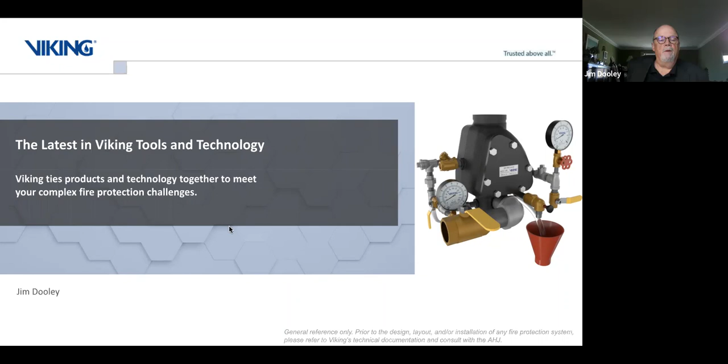Okay, well thank you, Drew. Today we're going to be talking about some of the latest new technologies out from Viking. Over the past year and a half, we've introduced new technologies that address a lot of the issues in the fire protection industry today, like corrosion mitigation. Many contractors and engineering firms are now entering into that Revit world. We've made enhancements to storage protection with new design criteria for our ESFRs, and new sensor technology for fire detection of battery energy storage systems, which is a big thing in our industry today. But we're going to focus on the new Viking dry pipe valve and the new Viking deluge valve, and go through digital tools available to simplify building a dry riser, and more importantly, what you need for a pre-action riser. So we'll address that now.

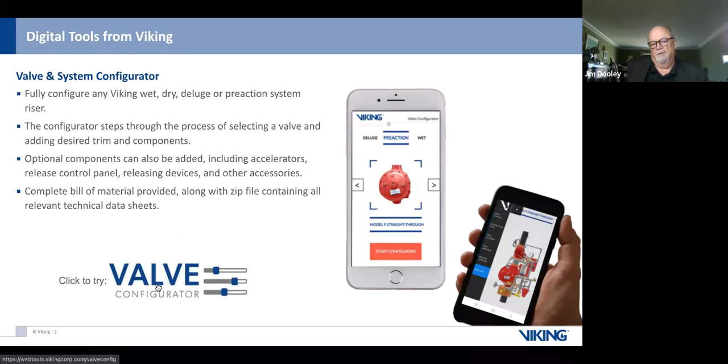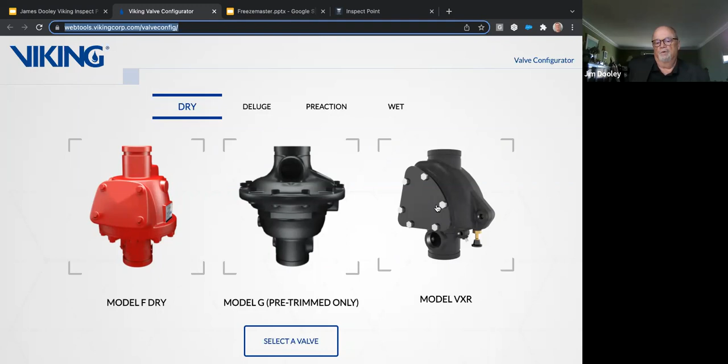I'm going to ask Drew - fortunately, working together, he's very familiar with the system valve configurator. So what we're going to do now is go through this valve configurator and build a dry valve riser, and show you how simple it is. We're just waiting for that 3D rendering to come up. This is just a web browser - they can just go to webtools, whatever this is. These are the three dry valves available to you. The Model G series will be discontinued the end of this year, so it won't be available for dry or pre-action configurations. You'll have to select from the old Model F dry valve, our legacy valve, or our new Model VXR dry valve. So we'll use that for today's example - just start configuring that dry valve.

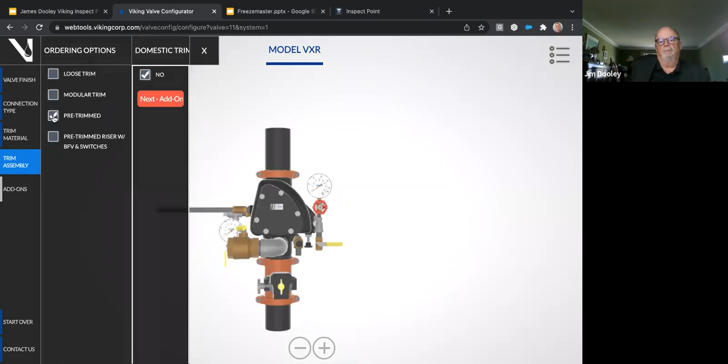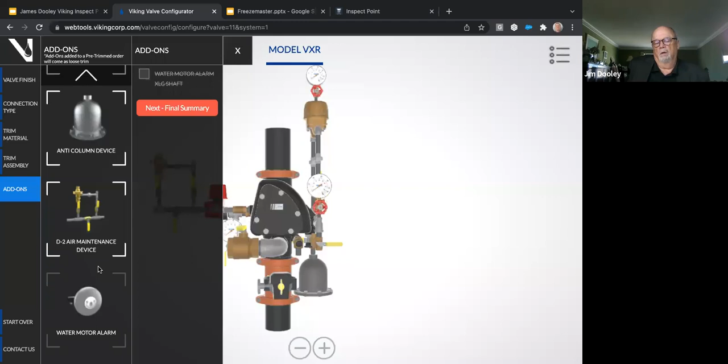It's going to build a 3D model rendering right here, and we'll go with a 4-inch dry valve. The orientation of the trim will be vertical. It does come pre-assembled from the factory, as you can see. Then we'll go with the pre-trimmed riser with the butterfly valve and the switches. We'll add on an accelerator, and the anti-column device, air maintenance device. The reason I'm suggesting that is when we go through the animation, all of those additional components are in the animation.

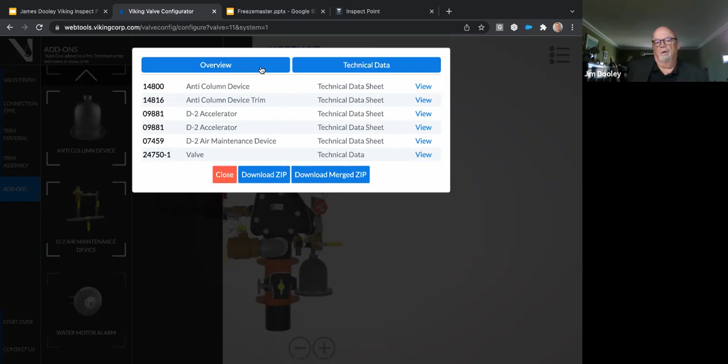Now you go to your final summary. This sheet gives you an overview of all the products you just selected to build that riser. Then you can complete the contact information and forward that on to your customer service representative, and he or she will get back to you with a price on everything you built for that riser. Now if you go to the technical section, you have the technical data sheets for all the products you selected. You can create a zip file for submittals to the consulting engineer, or just for your records on that project. It took us a minute to build that riser, and you'll eventually get a price along with all the technical information for submittal purposes to the consulting engineer or the authority having jurisdiction.

So let's see how fast they give me a price, Jimmy. Well, we'll hold off on that one.

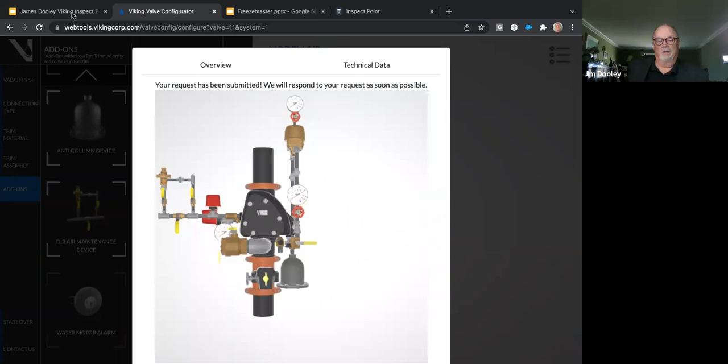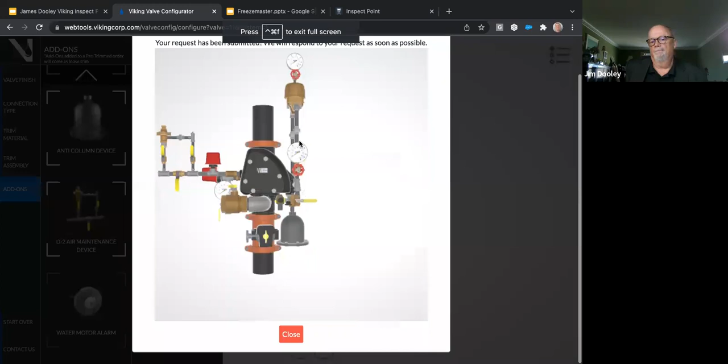Because to be honest with you, I don't know where it goes after that. I don't know if it goes to corporate or if it goes to one of the SupplyNet locations. I think it goes to SupplyNet. Okay. Now, Drew, if you could go back to that configurator again, what I want to do is build a pre-action riser to show how easy that task is.

So I just come back here. Yeah, just go all the way back. There we go. So yeah, go to pre-action. I've been with Viking for 31 years. And when I first started with Viking, that was the period when they were pulling halon systems out of all these buildings throughout the country that were protecting sensitive areas, cultural properties, data centers, whatever the case may be. And the most logical choice for replacement of that halon system was a pre-action system.

So I would get calls from fire protection contractors, consulting engineers. Well, look, I need a pre-action system. It's a single interlock pre-action system. What do I need? What does it cost? How do I get a specification put together? And this has really simplified the process.

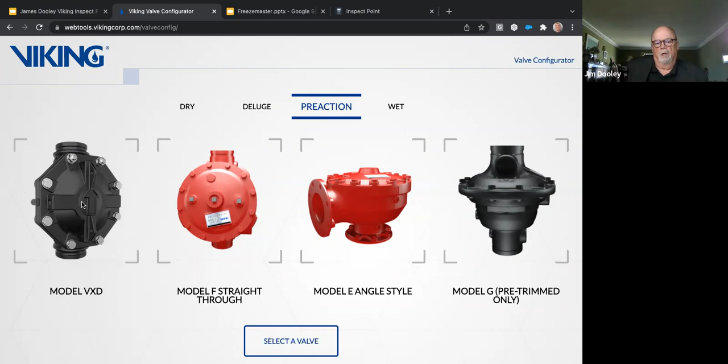So what you're looking at there are the 4 valves that are available to you. The new VXD, our Model F straight through, and our Model E angle style. And of course, as I indicated earlier, the Model G valve will be going away at the end of this year. So we'll use the VXD to build the riser. So Drew's going to start configuring that. And as he's building, a 3D model rendering is coming up.

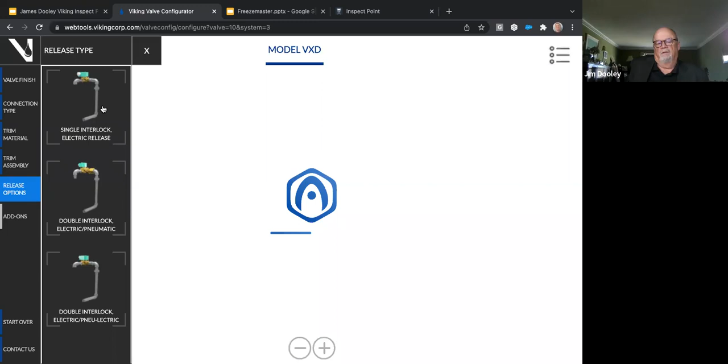It's available in a groove by groove or a flange by flange configuration, vertical trim orientation. It comes pre-assembled from the factory. So you have 3 releasing configurations there: single interlock, double interlock electric/pneumatic, double interlock electric/pneu-lectric. The most popular, as everyone knows, is the single interlock electric release. So why don't you hit that, Drew? Okay. And hopefully that rendering will come up soon.

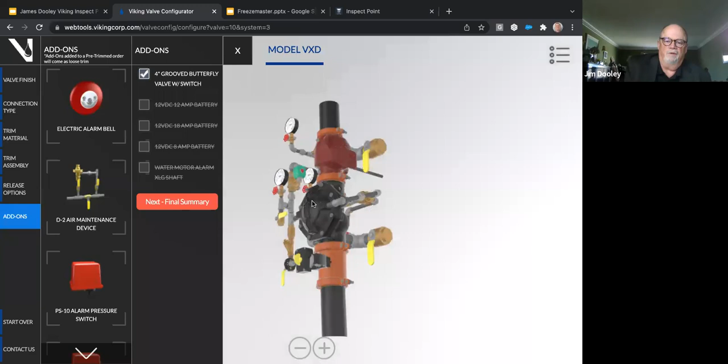There you go. So you can see we built that valve. There's your normally closed solenoid valve with all of the related trims. So the entire riser is built there for you. And then we'll go to the final. Well, actually, Drew, let's add the PS10, the PS40, and VFR-400 panel.

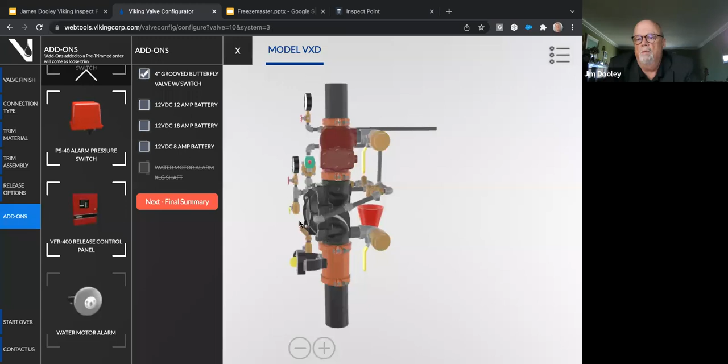I know you hit it in some of your slides. What's the difference? This is a newer deluge valve, right? Yes. Is this a diaphragm style valve? Yes, it is. And we'll touch on that when we get to the individual slide that covers all the features and benefits of that valve.

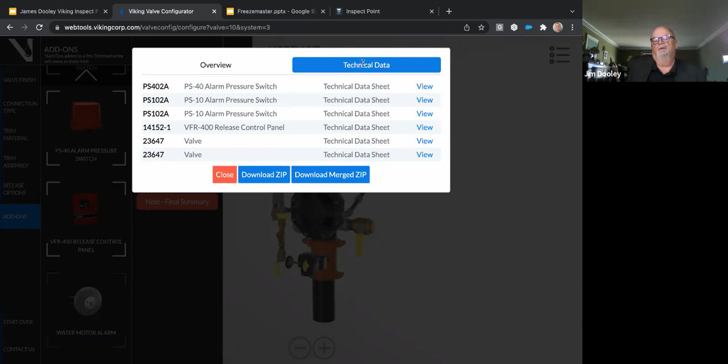So again, there you have your contact information. You can complete all that information, send that to the customer service representative, and he or she will get back with you with the pricing for that single interlock pre-action system and all the components that you selected to build that riser. The technical data sheets are all there available for you. You can create a zip file for submittal purposes for the consulting engineer. So you can see how simple it is to build that riser. It took us a few minutes to do that.

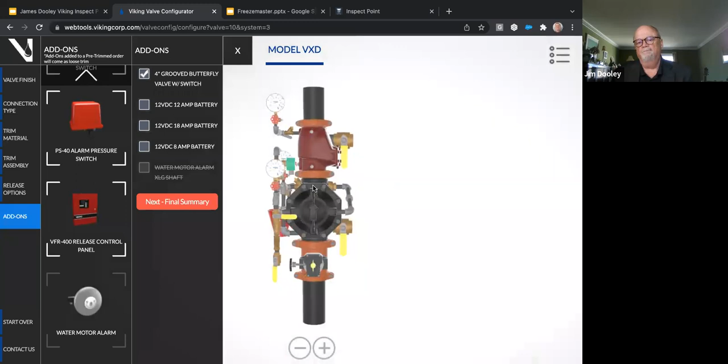The other thing too about this, and we'll touch on Viking tools for Revit. We have a completed Revit family library of all of our products. So when you build a riser like this, if you're working in Revit, you can very easily drop those families, the valve and the check valve, all into a Revit model. That's great. And then we can move forward there, Drew. Sure. Let me put this back in presentation mode.

Yeah, I was really excited about your VXR. A new dry valve is always interesting to hear about. Yeah, it's available in sizes 2 1/2 through 6 inch. It's an externally reset dry pipe valve. It's available in a groove by groove configuration. The footprint is a lot smaller than the Model F dry pipe valve. It's a lot lighter in weight.

If my memory serves me correctly, and Josh, you can chime in if you want, the 4-inch dry valve weighs 40 pounds. Wow. Yeah, so it weighs 40 pounds. So it's a lot easier to work with. The resetting mechanism, that push button, is on the bottom of the valve, so it's a little easier to use that to reset the dry valve.

There's no chance of that getting damaged at all by virtue of the fact that it's at the bottom of the valve there. Yeah, because I remember, coming through my career, I started manufacturing the DPV1 valve, and it's a great valve, but the plunger was always the issue, whether getting damaged or just corroding.

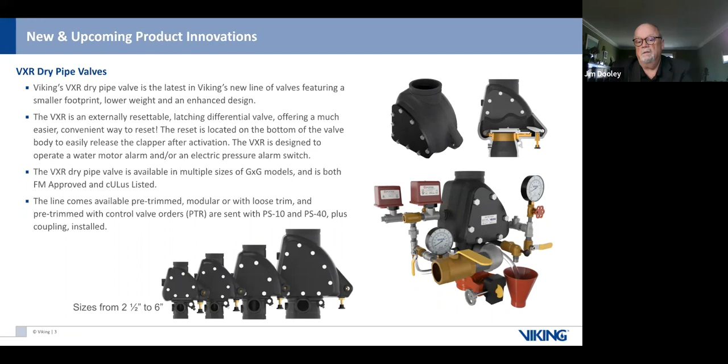So it looks like you guys put it on the bottom of the valve, which I've never seen before, which is cool. Yeah, and that's worked out real well for us. Great. And then we can move on to the next.

Now, what we're going to do here, Drew, is we're going to go through. We have a team, our digital team out there in Viking. We have these young ladies that develop these animations that are absolutely incredible. And field technicians can take advantage of this. If they're out in the field and they want to just kind of go over, well, how do you reset the new Viking dry valve?

And if you could hit that animation to get that started, it will go through. No, it's not hitting. It won't. That's all right. I know what you mean, and it is great for field technicians because it goes through all the different scenarios of resetting it and tripping it. Exactly. Now, is that on the web or is it on an app? It's on the web. You can go onto the web and have access to all these animations.

Not only the new equipment that we're bringing to market, like this dry valve, but we have animations on pre-action systems, wet systems, fire cycle systems, foam systems. So we have a pretty complete library of animations on all of these systems, and they are excellent tools for training. And field technicians who are out there working on Viking valves can access the Viking website and get to some of the tools that we have available to walk them through resetting a dry valve or encountering any conditions. They can very easily get an answer by just accessing the Viking webpage.

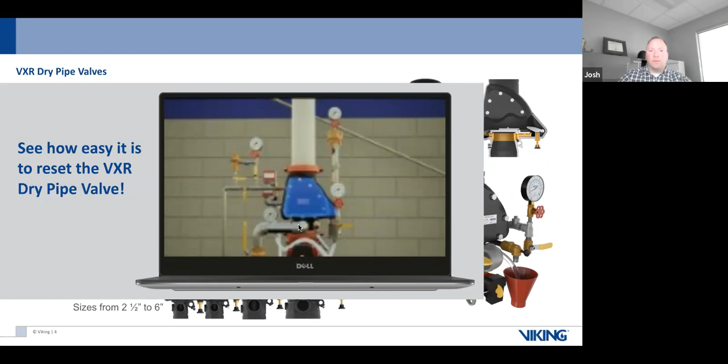Yep. And Jim, don't forget the Viking YouTube channel has a lot of these animations and videos on it as well. So that's another great resource for technicians out in the field. They can kind of scroll through the video and get to the point where they need to be. So those are out there as well. Exactly, Josh. So now we can move on there.

The model VXD deluge valve was introduced about a year ago. So this has been on the market for a while, and this will be replacing the G valve for pre-action type configurations discussed earlier, and that will be discontinued at the end of the year. As you can see, this valve is available in sizes 1.5" all the way up to 10". And I don't believe there are any other manufacturers that have a 10-inch deluge valve in the market. This is good when you get into the power industry, oil and gas industry, where you're going to encounter some of these very large systems. That valve is going to come in very handy.

The valve is available in a groove by groove configuration and a flange by flange configuration. It's offered in electric, pneumatic, and hydraulic release for deluge, and for pre-action, it's available for single interlock electric release, double interlock electric pneumatic, or electric to electric. So we have an animation on this too, should any of the technicians want to go to our webpage or YouTube and just go through the valve.

But yeah, I think those are helpful depending on not the valve itself, but the trim configuration of whether it is single, whether it is double interlock, electric pneumatic, or electric electric, right? Because sometimes they look similar, but they're a little bit off from the other one. Exactly. We know what separates the single from the double. It's the addition of the pneumatic actuator, some other components, and of course, if you're doing a double interlock pre-action system, the design's different. You got to add the 30% because you're calculating the double interlock pre-action system as a dry system.

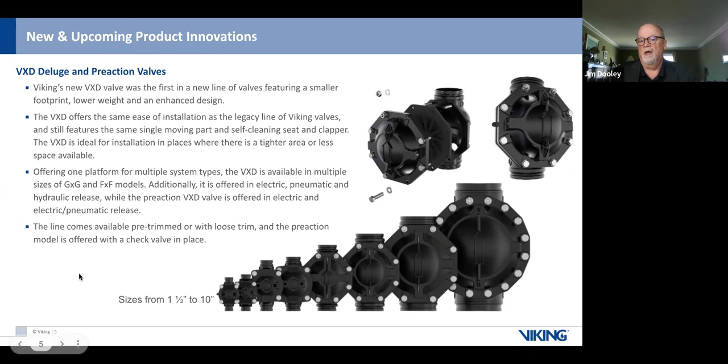Yep. Now, typically, when I built that configuration for the single interlock electric release pre-action system, I went with that because that's the most popular. Factory Mutual typically only accepts double interlock pre-action systems in freezer warehouses. But you will encounter, Joe, as you know, some end users in the mission critical world or in cultural properties where they insist upon double interlock pre-action systems because they don't want any accidental discharge of water dumping onto that sensitive equipment in that room or artifacts. Right. Yep. And then we can move on there.

Oh, there's your animation that I can't get going, but it is great. That's unfortunate. It's pretty good, but anyone who's out there, feel free to visit the Viking webpage and take a look at that.

Yeah, and Colton Platsky from Chesapeake Fire just gave you guys a shout out for all the stuff in the field. So there you go.

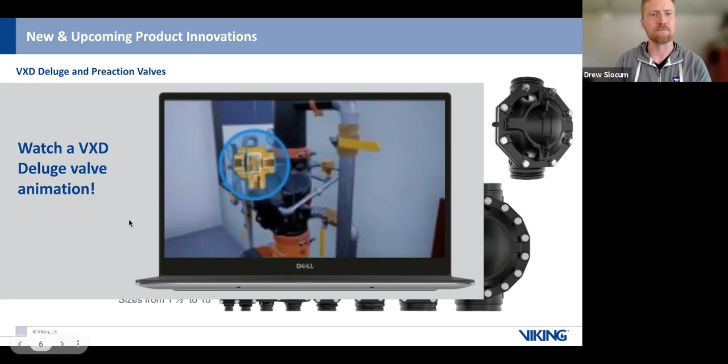Viking tools for Revit. Many of the attendees here at the podcast, Drew, are probably from the contracting end of the business, but when you get into the consulting engineering area of our industry, most of those larger engineering firms, Jacobs, Jensen Hughes, Cosentini, just to mention a few, they're all working in the Revit world. It's being driven by the architects.

And we at Viking, we have a full complement of tools and piping utilities that are available to engineering firms and or contractors that are working in the Revit world. We have a clean agent assistant program where you can very easily design and calculate a clean agent system all within Revit. We have that integrated the system valve configurator that we went through. As I indicated earlier, you can drop those families right into the Revit model.

We have a completed Revit family library of all of our products, all of Fireflex's products, and we have a connection to ASC. So you can access all the ASC families and use that to drop into the Revit model. We have a BIM estimator. We also have a HiEx estimator.

If you're doing any work in the 409 type of world, or working for the Department of Defense, in that world, you can use that HiEx estimator to determine the amount of foam required for the hangar and the amount of generators required to protect that hangar.

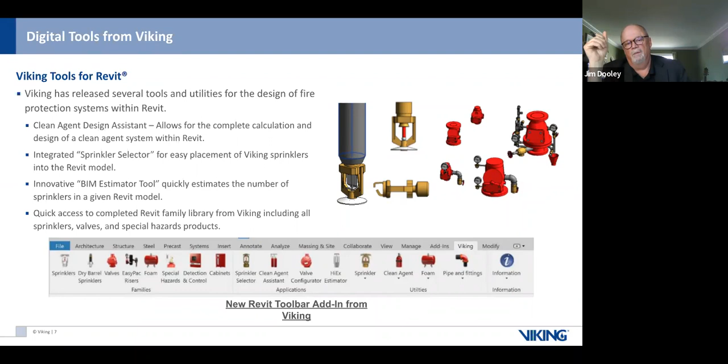So that's great. And there you go, Drew. You can move on to the next. There you go. I got really excited about this. We were talking before the podcast started how I used to use the Excel sheet.

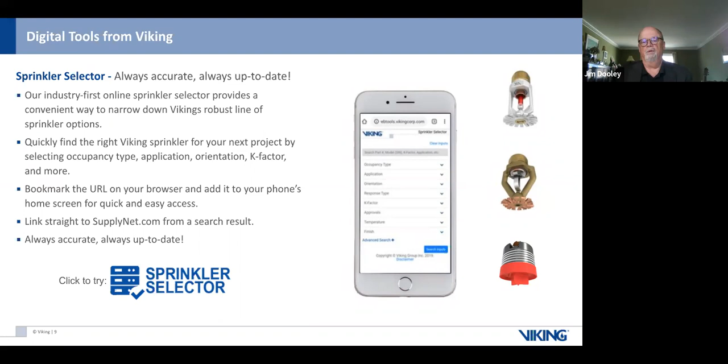Yeah, exactly. And Drew, as you know, back when you were working for Viking, you would get a call from a consulting engineer or a fire protection contractor: Hey, I'm looking for a sprinkler head that's Factory Mutual approved for ordinary hazard occupancy with an extended coverage listing. Now, it would take you a lot of time to find all that information in a data book or on a web page. So what we'll do is we'll go through this sprinkler selector program, and I'm glad that you're navigating this for me because you're familiar with doing it.

So you have a filtering scheme over there on the left-hand side, and Drew, I'll let you decide what you want to pick. Yeah, let's just go light and ordinary, in terms of occupancy area. So you hit the search button there, go to your application, extended coverage. I have a certain sprinkler in mind. We'll see if it brings it up. I'll let you go through the filtering scheme.

I got it installed back in the day in the tallest building in New York City. That's right, you did.

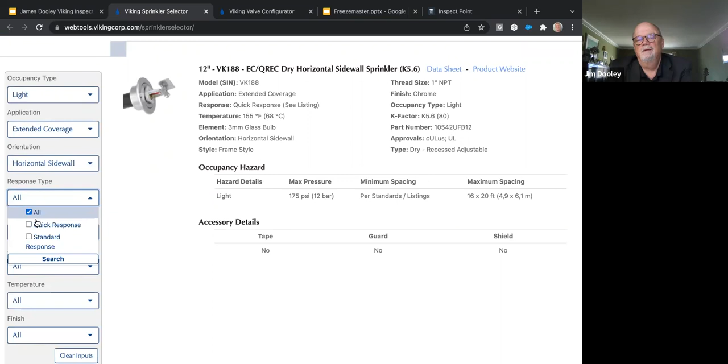All right, there we go. It's narrowing it down. Response, obviously it's gonna be quick. Okay, and K-factor, I think it's the 8.0. Okay, there it is. Wow, there you go. That's cool. And then you've got your approvals automatically.

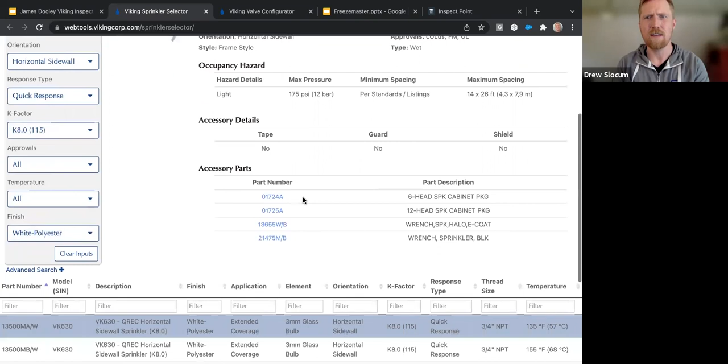Oh wow, you've got all the different finishes. That's great. Oh, it even changes the color. That's cool. Oh, it has the accessories too. So you got your wrenches. Exactly. And then you have the data sheet. You can access the data sheet. You can go to the product web page to get a brief overview of the product.

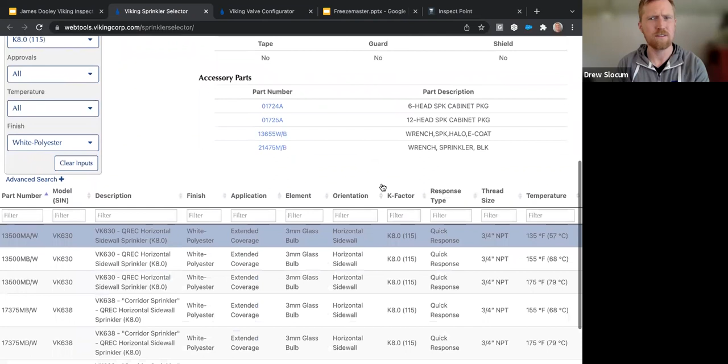I see that. What's this? Oh, these are all the different configurations, all the sprinkler heads. Yeah, so these are all the sprinkler heads that were the result of that filtering scheme that you went through. And you can also select if you want to go with concealed or flat style as well.

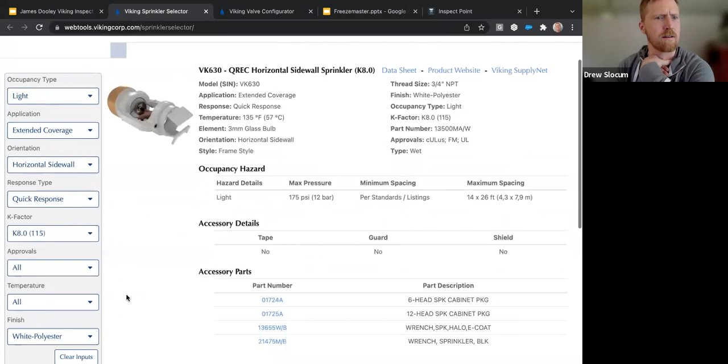Oh, okay. Yeah, if you go all the way to the bottom, see where it says advanced search? Drew, go down a little bit more. Yeah, hit advanced search and then you go to concealed. Oh, I know this isn't, I got to move.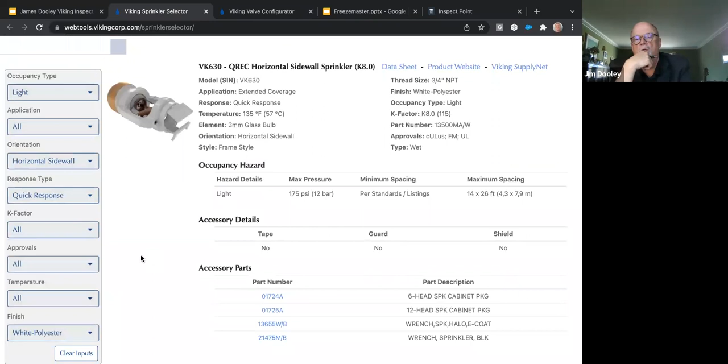Let's just move off of all. There you go. And light, quick, 8.0. Actually, probably the best bet is to go select concealed first. Oh, all right. Yeah, select concealed first, Drew. There we go. Concealed only. Okay. Right. Then it'll bring them all in there. Exactly. So I know one common head that comes up for concealed type sprinklers are the flat plate concealed heads.

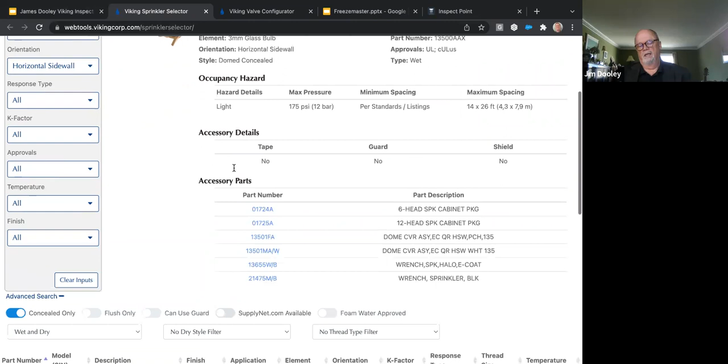Yep. Let's just do all. I know we're spending a lot of time on this. This is really cool, Jim. I like this. So I think everybody gets the idea of how it works. And then, if you're working in Revit, one of the instruments for dropping a family into Revit is from the sprinkler selector program. The other, of course, is taking it off the ribbon in tools. You also have supplynet.com available.

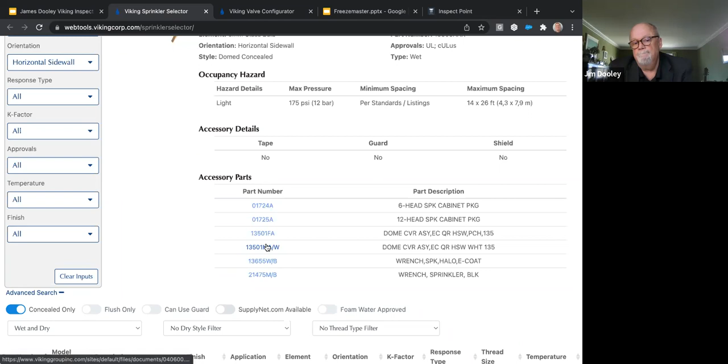What is that? That I don't know. To be honest with you, it's probably an ordering mechanism. It could be ordering information. That's great. I know supplynet.com's been a big initiative to try to get people to order through there. Exactly. Jim, that particular toggle is for supplynet.com, an e-commerce platform. So if you want to get it right from that website, you would click on that, and a lot of the sprinklers are available right on that e-commerce platform. Basically, it just takes you right to it.

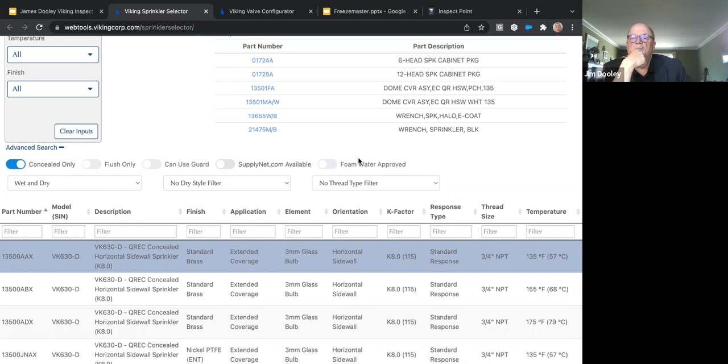And I don't want to steal your show. I just wanted to chime in there for when we start talking about foam. We added a new toggle to that particular screen, which you saw, foam approved. Yeah, right there. Oh, yeah, that's good. So that's just a recent addition. So if you want to see what fire sprinklers are foam water approved, you could toggle that on, and it'll take you to those particular sprinklers. That's a great idea, particularly with new fluorine-free foams out there. You need to know which sprinkler discharge devices are approved with that foam, and this would give you that answer.

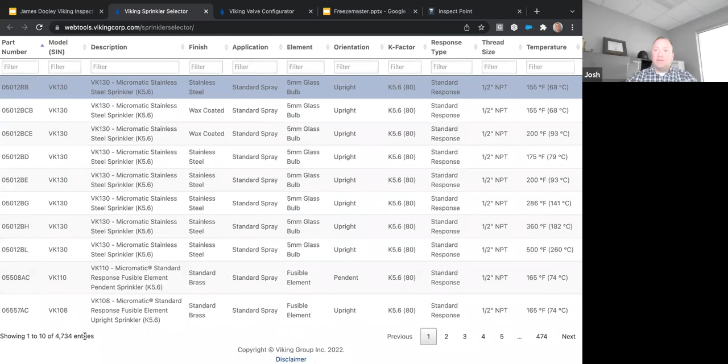Yeah, and it's really cool. One of the things that I like to do with people with the sprinkler selector is clear the inputs, and if you undo that toggle right there, and just scroll all the way down to the bottom, you'll see entries in the bottom left. There's 4,700 different entries of fire sprinklers. So it's not how many we manufacture, but those are the different variations, so to speak, that are available. And then once you click foam, there's 458 different entries available as far as configurations, from finishes to temperatures to K factors, all that kind of stuff.

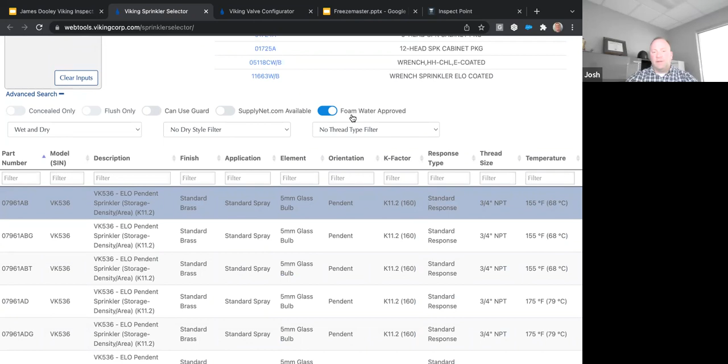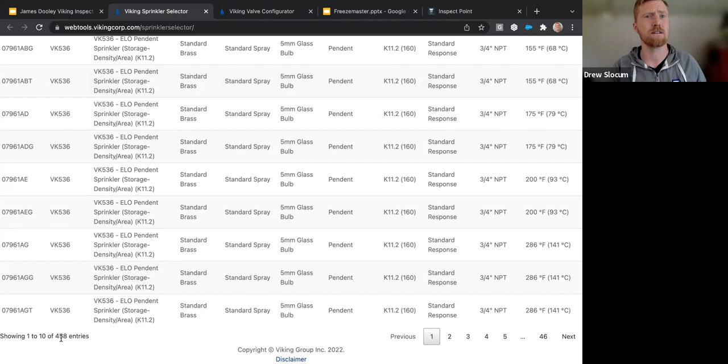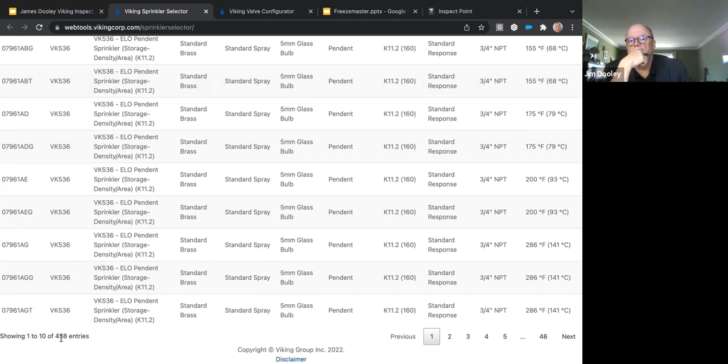Oh, that's big. That's crazy, 458, because I know foam listings on discharge devices are pretty minimal compared to the full range, right? So 458 is a lot. That's great. Now, again, I'll preface that with it's variations, right? So if one sprinkler is available in 10 different temperatures, then that would account for 10 of them. Or finishes, right? So it's just variations. But that toggle's on there under that advanced search, and that's a big thing.

And just up a little bit is all the data sheets associated with those sprinklers, right? So you can click on the data sheet right there for the sprinkler. Yep. So it's kind of cool. Just extra. Yeah, I got involved in a few projects over the years where they have one foam system in there and they liked a certain manufacturer's sprinkler heads. They just tossed it in there and it definitely wasn't listed. It's quick to change out a head, but it's still an issue with foam systems. Make sure it's listed correctly. Yeah, exactly.

All right. So moving on, we've covered all the valves.

There we go. So the Viking SFFF foam systems, and I just want to talk a little bit about it before we get our specialist on there, Josh, about this. My job with Viking is to reach out to consulting engineers and end users, insurance companies, to generate interest, to allow me to do webinars, to have our fire protection product specialists do webinars for these groups.

When this product hit the market and it got out there, I had consulting engineers and insurance companies reaching out to me for us to do webinars. So the tables were turned there, and we just did one for Boeing on Monday morning. So what I did is, the insurance companies, Chubb, Travelers, Marsh, the list goes on and on.

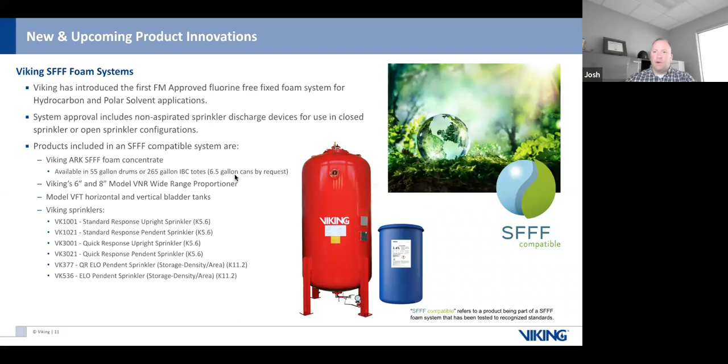Yeah, I can see it going that way too. There are so many states requiring at least an analysis on their systems. I don't call it the newer Halon, but I know there's some clean agent stuff that's getting phased out as well. This is great, I didn't know a lot about this.

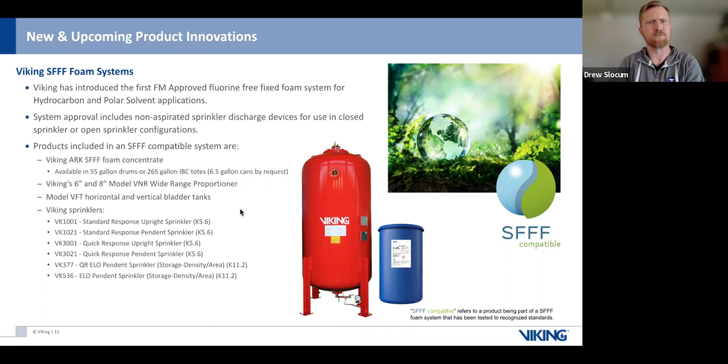If there's any questions, feel free to toss them out there. I know there have been a couple comments that I can bring up toward the end. What else we got here? Oh, Freezemaster.

NFPA 13 light hazard is approved up to 200 gallons. It's also approved between 200 and 500 gallons, but if you're going to go in that area, you're going to have to design that to a dry system. Going above 200 gallons, it's approved for ordinary hazard group 1 and 2 up to 375 gallons, Drew. So that pretty much gives you an overview of the approvals in those three different categories: 13D, 13R, and 13 light and ordinary hazard occupancies.

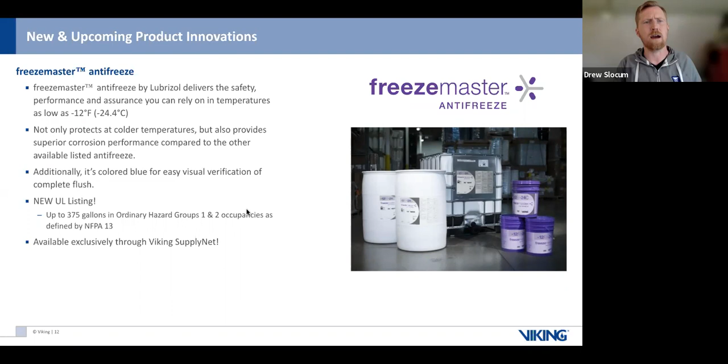One of the big reasons I thought about Freezemaster is there's a big deadline coming this year, the end of September. There's a lot of existing systems out there with unlisted antifreeze, and it's kind of required now. I think they pushed it off two years, but since there's some listed antifreeze in the market now, I think it's going to stick.

Well, I got a chat here. The other thing too, the Freezemaster antifreeze is approved with galvanized pipe.

Oh, right. Okay, I do have a slide on this actually. It pretty much covers all the pipes that are available out there and has approval for them. Let me toss this up.

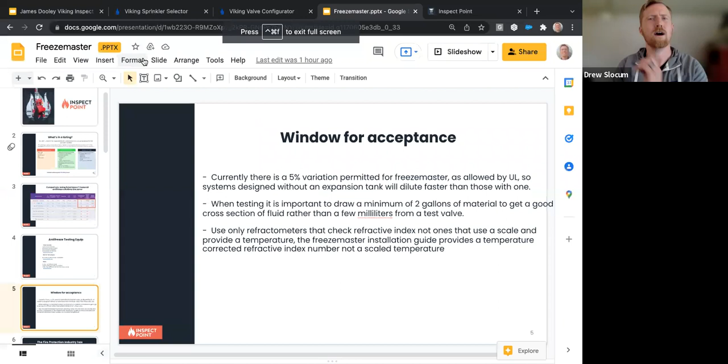So I talked with my pal Sean Pierce at Blazemaster, who launched the Freezemaster with you guys, he's one of the Lubrizol fellows. I wanted some ITM things for inspection, testing, and maintenance, because you're running into a lot of systems out there that are currently existing.

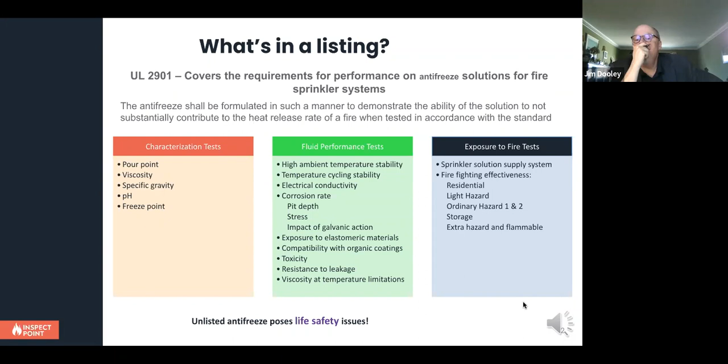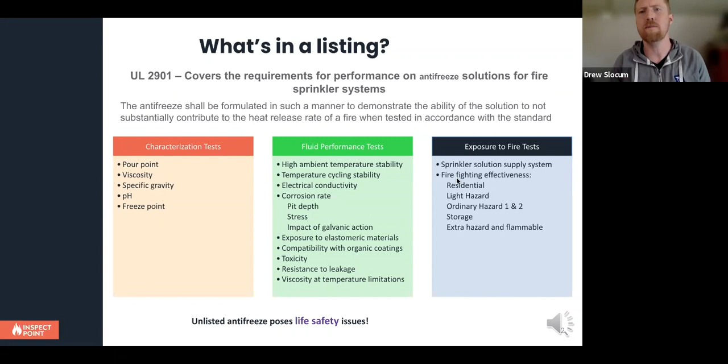What's in the listing, UL lists the antifreeze. There's some considerations here, but I'm not going to get too involved. Here's the different listed antifreezes out there, and like you said Jim, Freezemaster is the only one listed for galvanized pipe. Some of the other ones are not.

You said there are ordinary hazard volume limitations, which probably everybody will expand as they do more testing. It's an evolving thing. There hasn't been a solution up until last year or so, maybe a year and a half ago, and this will keep evolving.

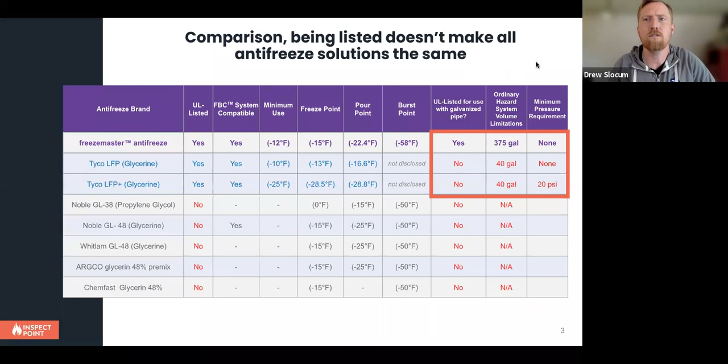Stay tuned, but Freezemaster has been on top of it. One of the other things on the ITM side is just testing it, and it's required per NFPA 25 that you're testing your antifreeze. This is at least what Lubrizol recommends for hydrometers and refractometers, getting your concentration level on that annual basis per NFPA 25 is critical to make sure it's in compliance.

And there's a new window for acceptance as well, a 5% variation of that concentration allowed by the UL listing. Sean was explaining to me that if you have a larger system, you better be putting in an expansion tank for that expansion and contraction over the summer months.

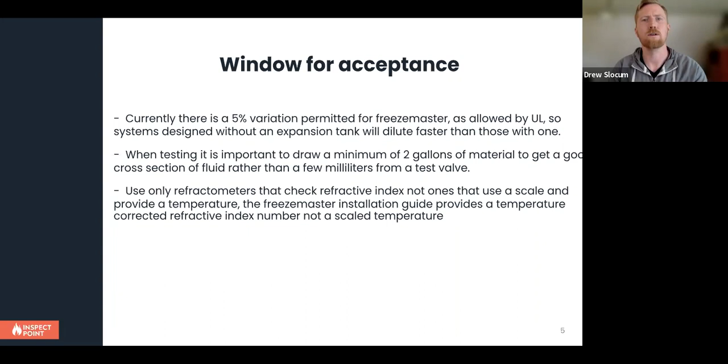Make sure you take that into consideration when designing the system, because when you're going around every year doing that acceptance, you don't want it too diluted out of that 5% range and have to dump more Freezemaster or whatever listed antifreeze into there. So just some guides I wanted to push out there, since there's a heavy inspection component to it.

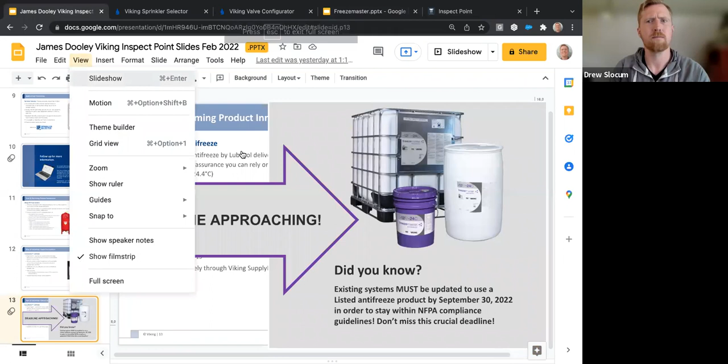Back to this, let's see here. I got a couple questions out there. Okay, does Viking sell AFFF 3% substitute for full scale testing?

Do you know any full scale testing? So I think the testing could be one of two things, right. There are companies out there that use surrogate foam concentrate for testing, so that could be an option as well. But as far as full scale testing is concerned, anything AFFF is not a thing anymore from a Viking standpoint. So synthetic fluorine-free foam, on the other hand...

Extra foam can be purchased as a part of the approval process. That way, when you're doing your testing, you have enough concentrate to put back into the bladder tank itself. So hopefully that helps. Yeah, that helps.

So what happens to the grate nozzle? There's a question in here. Yeah, so the grate nozzle is currently not approved with SFFF foam, but we are actively and aggressively working to get the foam product line back to where it was, pre-transition to synthetic fluorine-free foam.

I guess the point there is, we're in the preliminary stages of synthetic fluorine-free foam being rolled out, and we got to start somewhere. We have some products that are approved that we can kick off with, and as we get moving into this process, additional products will get tested and approved. All of that work takes time and is quite expensive to do, which we're committed to doing. It's just not approved at this particular point in the game, but we do plan to get back to that point for sure.

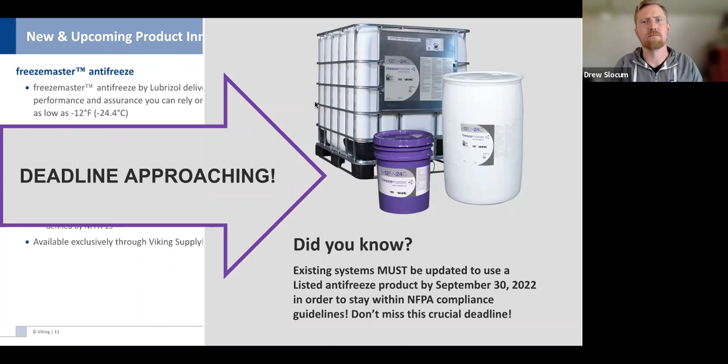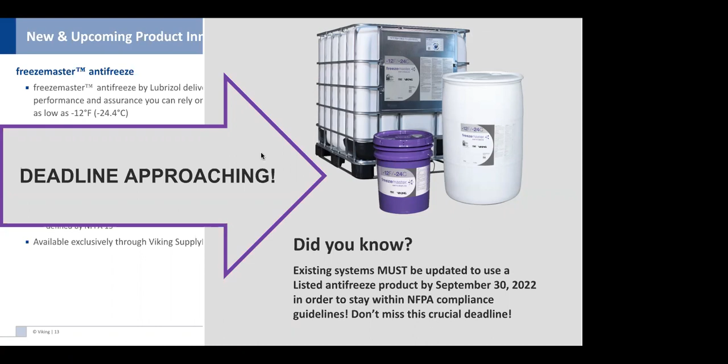I'll speak on where we stand now. We have one concentrate approved at this point, and it's the Viking ARK. I know the question was will there be one — that's hard to say because right now the technology is so new. But at this point, we have the Viking ARK, and that is the only thing we have approved as far as synthetic fluorine-free foam is concerned for low expansion systems.

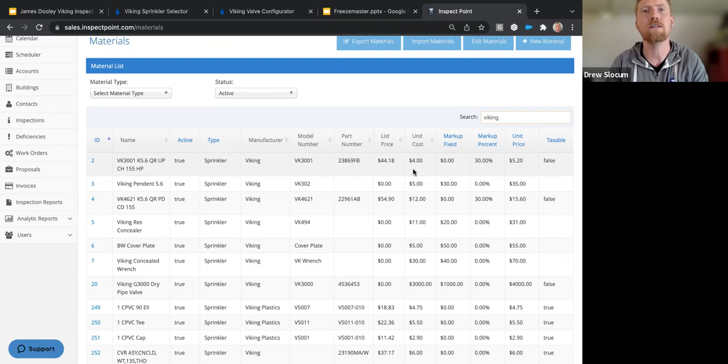Jimmy, you want to hit on any of the training opportunities? We got a few minutes left. Many are probably familiar with the seminars we used to conduct at our facility in Hastings, Michigan. We're offering those seminars, 2-day seminars now, out in Caledonia, Michigan, in our new facility. And Josh, there are two classes, correct? One's an introductory class that really just touches on the basics, and then there's a more advanced class that gets into pre-action, foam, and clean agent, correct?

So the courses, Jim Lake, the VP of training, just realigned those courses. We originally started out with two-day programs, like you mentioned, but for 2022 his intention is to run a 3-day course on the water-based side — sprinklers, wet and dry the first day, deluge pre-action and other specialty systems the second day, with a third day...

We've made some changes to what we have here. The third day will be like a troubleshooting lab where we'll have different things set up, and you'll be able to troubleshoot different risers and maybe use some repair kits, that kind of stuff. Should be a really good opportunity. And foam is certainly going to be a hot topic this year, so we'll probably have a 4th day that's optional, which will end up being some stuff on foam.

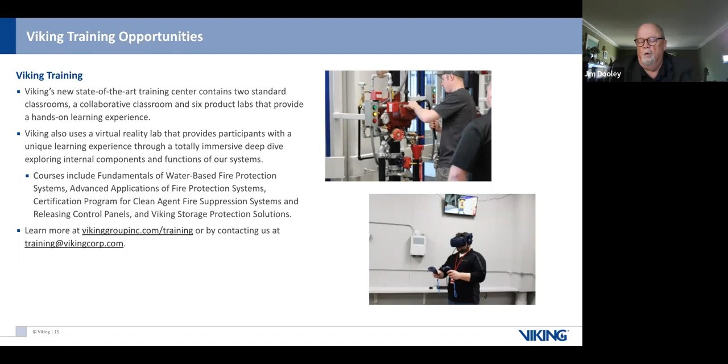So, and there are a number of other, not tools, but probably the most impressive feature you have out there is that hydraulic lab, Josh. And you're going to expand on that for the attendees, because typically you're the one that's doing the presentation for that hydraulic lab. Yeah, we have quite a bit going on.

So we have a whole riser lab with 17 functioning systems that can be tripped and tested and restored, from double interlock pre-action systems to single interlocks, dry pipes, wet systems, Firecycle III, pilot pressure regulating, all these different types of risers functioning down there.

We have the flow lab, where we can demonstrate different sprinkler flow patterns and talk about some of the stream characteristics from those devices. There's 2 fixed hose monitor nozzles so they can flow. It's actually pretty impressive, 1,000 gallons of water at 100 psi and oscillate in the lab. So that's a recent addition, which is kind of cool to see.

And then kind of a components thing. If you're familiar with Viking, we use things like pressure operated relief valves and pneumatic actuators, so we can hook up those components individually and see how they function. Same thing with accelerators. We can take them off to the side and hook them up and do some hands-on with those as well. So all those different options are here. We have a couple foam systems and some clean agent systems as well that you can put your hands on.

So the training center here is quite expansive and available for anybody to use. The training is free, and you get a lunch out of it. You just got to get yourself here and pay for your accommodations. We don't let anybody sleep in the parking lot though.

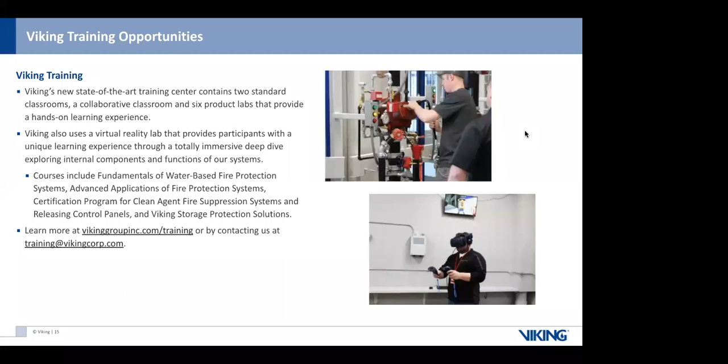So maybe I got to do an inspection, testing, and maintenance class out there. Yeah, sure. Get in touch with Jim Lake. See what you can do. Yeah, I might have to do that.

Another offering we have out there, Drew, is our micro learning sessions. They're only 3 to 6, 7 minutes long. It can touch on flow control technology. It can touch on residential technology. They're excellent sessions for someone who's getting into the industry, entry-level designer, entry-level technician.

And if you want to learn more about residential sprinkler technology, it touches on 13R, 13D, light hazard residential, the design criteria, the different sprinkler heads that are available. And another class is devoted strictly to concealed sprinkler heads, concealed cover plates. What type of cover plates are available, colors, sizes. Nice.

You got some Viking tech talks here, which is pretty cool. I haven't listened to the podcast yet, but maybe I'll have Jim on my podcast to talk about podcasting.

The tech talk that they do on FM Global, recent revisions to FM DS 8-9, is very impressive. Those revisions are significant, and I believe, if my memory serves me correctly, James Gollenbo and Jim Lake do that tech talk. So that's definitely worth taking a visit to. Cool.